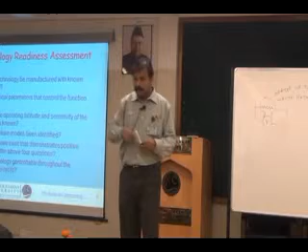Can you tell me what you understand by failure modes? This is one of the failure modes. I fail. When you sleep, I fail. This is one of the failure modes in lecturing. Do you understand? Get out.

Now why should I worry about the failure mode? Because once I know the failure mode, I can contemplate what is the effect of the failure on the rest of the system. So you have to identify the various failure modes of the product. We have to see whether these failure modes are completely known.

Next, does the hardware exist that demonstrates positive answers to all the above questions? It is not good enough that somebody with his theoretical knowledge says yes to all the 4 questions. Is there any proof in the field? Is there any product functioning which proves the technology, answering all the 4 questions above as positive? Probably I will give you an example which is very contemporary and relevant. Then you will understand the power of this tool.

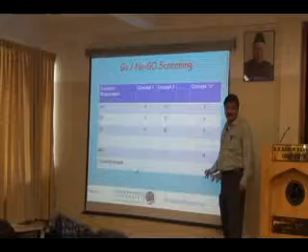Go, no-go screening: here what we do is we have various concepts, concept 1, concept 2, etc., concept n. Then you have the customer requirements. The customer wanted many things, and ultimately the product design is to meet all the customer requirements. So customer requirements are listed, and you have various concepts. If a concept meets the customer requirement, mark it Y; if it's not meeting the customer requirement, say N. You evaluate the various options and concepts and arrive at the one that suits your requirement best.

So this is a go, no-go screen. In go, no-go screening, there are only two options: one is it satisfies, or it doesn't satisfy. It either goes in or it is not going.

In metrology, in inspection also, we use a particular technique. If the dimension is acceptable, it is go. If the dimension is not acceptable, it is no go. In inspection, if a particular product is acceptable, it is go. If it is not acceptable, it is no go.

In inspecting components, we use this technique. The same technique is used to evaluate various concepts. A concept is acceptable for the customer based on a particular trait - then it is accepted, otherwise it is rejected. So you arrive at an overall evaluation and choose a particular component which satisfies the maximum customer requirements.

Next slide is the last one - the decision matrix method. It is an improvement on the go, no-go technique. It is a very comprehensive method. It gives you an option to quantify the performance.

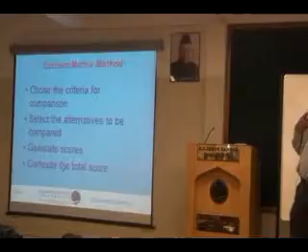It is a four-step process. Choose the criteria for comparison. Comparison on what basis? You are going to compare four options - on what basis?

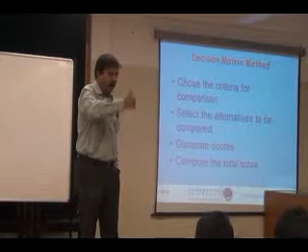So where can you arrive at these various criteria? It can be from technical specification, it can be from the voice of the customer, but arrive at criteria that are going to be used for comparison. This is the first step - I am going to compare the four alternatives based on these criteria. I can select 10, I can select 50, I can select 100. You arrive at the criteria to be selected.

Then select the alternatives to be compared. There can be 100 options that have come out of brainstorming or whatever tool you have used. Select the options, alternatives that are going to be compared. So the criteria form the various rows, and the alternatives form the various columns.

Generate scores. For example, a particular criteria, say aesthetics - how good looking the product will be. This is the criteria, and I have three options: 1, 2, 3. So you give a score. The score can be +1, -1, 0, or it can be +2, +1, 0, -1, -2.

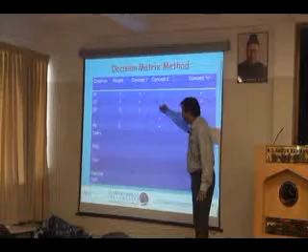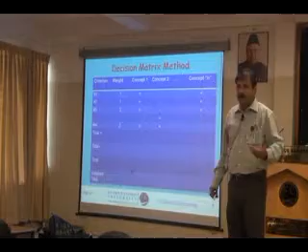This is the decision matrix method I have identified. I have also attached a particular weightage for each criteria. 7 means that is an important criteria, 1 means criteria 2 is not that important - or rather, I am saying that criteria 1 is 7 times more important than criteria 2. So you attach different weightages for different criteria.

Then you have the various concepts - concept 1, concept 2, concept N. Here I have used plus or minus, but it need not be just plus or minus. It can be from -3 to +3, or -2 to +2, or -1, 0, +1.

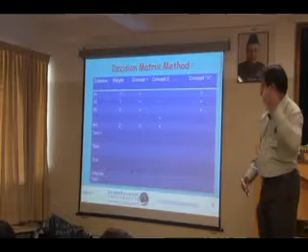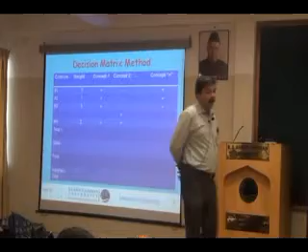It is your choice. Then, if you are using +1, -1, you can have a total plus, total minus, and a total - that means adding these will give you the total. Then I can also have a weighted total. So based on the total or the weighted total, we can make a decision whether a product is acceptable or not.

So these are the different ways by which the comparisons can be made - the various concepts can be compared and an evaluation can be made. Is it okay?

By next class we enter into the third stage of the design cycle, that is the embodiment design, the actual design implementation. We will see that in the next class. So today, is there any questions you have, any doubts?

Any questions, any doubts you have? Shall we proceed?

Now I have a very interesting product discussion today. I got curious because I happened to travel through Mount Road a week back, and the whole landscape has changed. I was surprised to know that a tunnel is being built under Mount Road. I became curious and wanted to know the technology behind it. The machineries are being imported from Japan, I don't know what they're doing for Chennai. Hitachi is one of the major players manufacturing these equipments. So I wanted to know what these tunnel boring equipments look like and how they work, and I found some interesting videos. I'll share them with you. Listen carefully, we have time today so we can see them thoroughly to understand better.

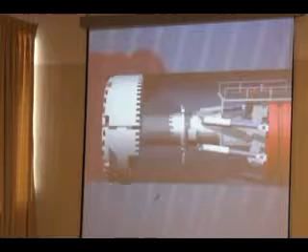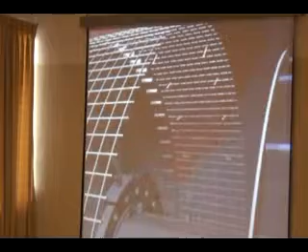While boring goes on, securing work is carried out under the protective roof immediately behind the cutting head. Here, for example, two anchor drills with independently maneuverable drilling carriages are used. They drill holes into the rock for anchors which can be up to 4 meters long. Another example is a mesh placing machine, which travels over the anchor drill and places steel mesh behind the protective roof to give protection against falling rock. Which securing measures are most effective against rock falls depends on the local geology. In one place steel anchors are best, whereas in another it may be steel mesh, caps or arches.

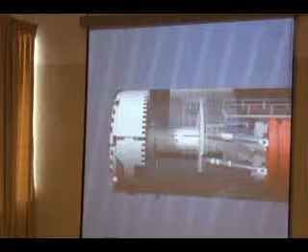Another means of securing are steel arch segments. The same mesh placing machine pre-assembles them under the protective roof. The complete ring is then transported to its final position, pressed against the rock, and installed there. It would now also be possible to secure with concrete, but we'll come back to that later.

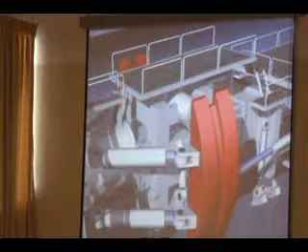When the TBM is working in hard rock, it uses a so-called gripper to press against the rock on both sides. Each stroke of the gripper takes the drive forward another 2 meters. The backup train moves forward with the boring machine. At the end of the stroke, the gripper is retracted, moved forward to the new position, and then tensioned again. The TBM can now cut another 2 meters.

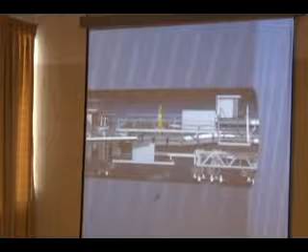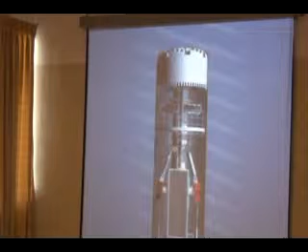Here we see, speeded up, how the feet are raised and lowered. When the second and fourth foot are raised, the backup train moves forward. When the first and third foot are raised, the cutting head drives forward. Here we see the view from above. The hydraulic mechanism releases the gripper for it to move forward, then it is tensioned again for further boring. The TBM can drive up to 40 meters per day.

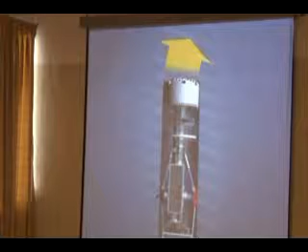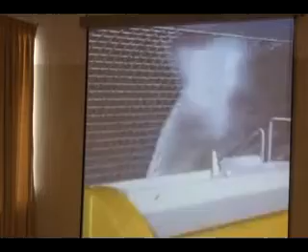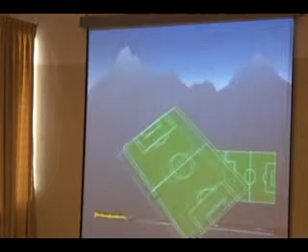Hydraulic cylinders control the horizontal and vertical position of the cutting head, making it possible for the TBM driver to steer the direction at all times. The shotcrete robot now finally secures the finished tunnel walls. From the boring head to here is a distance of 60 meters. The backup train consists of all the installations and materials needed to supply the boring machine and remove the excavated rock. It is like a moving factory, 410 meters long, about as long as 4 football pitches joined end to end.

This TBM was specially developed for the hard rock of the Gotthard. 50 of the 57 kilometers of both tunnels will be excavated with tunnel boring machines.

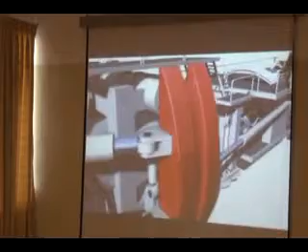So the next video is about the Bangalore Metro Rail project.

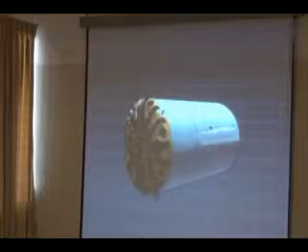BMRCL officials wanted to ensure that the disruptions caused by the building of these stations were minimal.

It's precisely the fact that it's in the middle of the city that we decided to go underground. There were certain sections where you cannot have elevated lines except at great destruction to the people on either side of the road. Apart from that, there is also a legacy to protect.

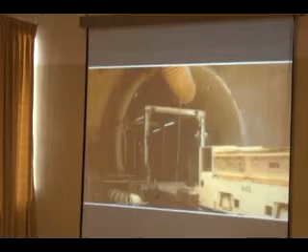The contractor for the Bangalore Metro underground construction is the CEC Soma CICI joint venture. While Soma works on the construction of the 4 underground stations, the Continental Engineering Corporation and its subsidiary in India, CICI, works on the tunneling process. With years of international expertise in building tunnels, high-speed rail, bridges and highways, and after meeting success with the Delhi Metro construction, CEC now brings the TBM to the Garden City.

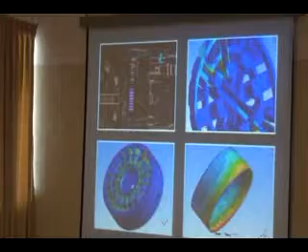The convoy is making good time, but it must reach Majestic Station before 6 a.m. to avoid the morning traffic. As the TBM had to be custom-made for Bangalore's geological conditions, a series of tests were carried out in manufacturer Hitachi Zosen's factory in Osaka, Japan. A visiting team of BMRCL and CEC engineers carried out the final inspection before the TBM was disassembled and shipped to Tamil Nadu, where it was loaded onto 28 trucks.

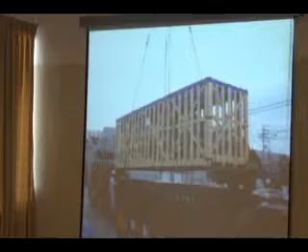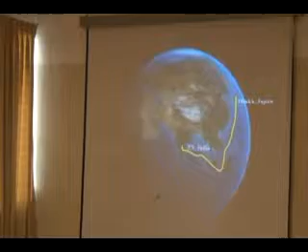Hitachi was a wonderful experience, and as the head of this organization, I learned a lot. My colleagues learned a lot in organizational behavior and group dynamics. The convoy, after traveling 7,500 long kilometers, finally stands at the Majestic Station at the break of dawn.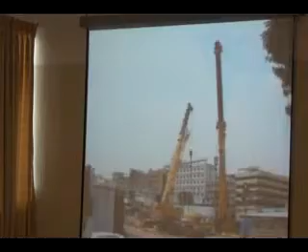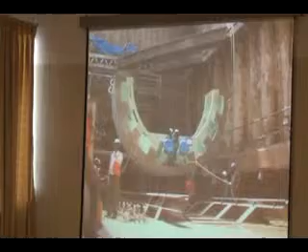There is excitement in the air. A shaft 28 meters long, 22 meters wide, and 16 meters deep is ready for TBM parts to be lowered into. Assembling the parts is going to be no easy task. Months of preparation have led to this moment, and all the workers have been trained to handle equipment and to follow safety precautions. The first part to be lowered is the front body lower section, which is the foundation piece around which all the other units are bolted.

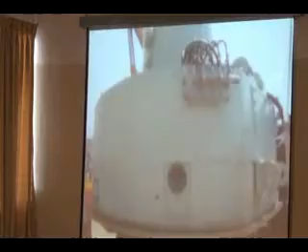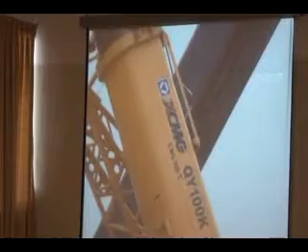Overseeing the assembly process is Project Manager Russell Brown. The second part to be lowered into the shaft, that weighs approximately 56 tons, is called the drive module. This section needs to be turned over into a vertical position. To do that we use two cranes. One of them is a 350 ton duty crane, and the second one is a 100 ton assist crane. Here, communication poses a greater challenge, as interaction with the crane operators is only possible through hand signals and radio.

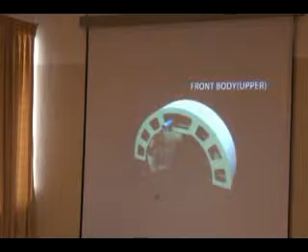The third module is the front body upper part, which is now fitted on top of the front lower body, wrapping around the cutter drive structure. Then, 10 cutter drive motors and a decompression chamber are fitted onto the driving module. We often inject an air pressure up to approximately 30 psi. This pressure is equivalent to what you would put inside of your car tyre. If you took this car tyre and put it inside of the cutter chamber, it would actually go flat because of equalising the pressures.

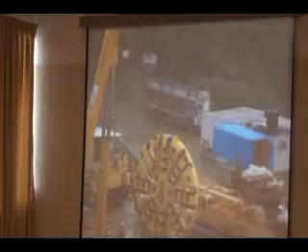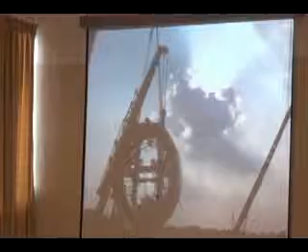On the 29th of April 2011, fighting with the Bangalore rains, the engineers lifted and lowered the cutter head. Post-cutter head positioning, the articulation section is bolted on, which allows the TBM body to be angled by degrees. The middle body rear side section, equipped with the 16 thrust rams, is then fitted into position. These are used when building segments or when pushing forward during excavation.

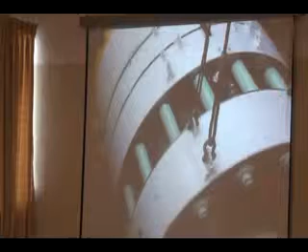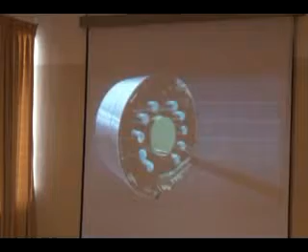Attached to this middle body is the slurry inlet and outlet pipe, which helps in carrying the drilled mud to a recycling plant on site. Here, coarse gravel and fine particles are removed, and the resultant slurry is then sent back to be used for tunneling. The final component is the rear body section with segment erector. This unit is fitted to lift and place the tunnel segment into the correct position before thrusting forward.

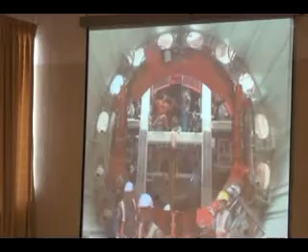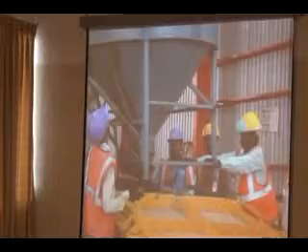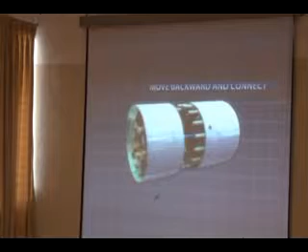These segments are manufactured in a plant in Peenya industrial area, where over 100 construction workers help manufacture segments at a speed of 12 segments per day to meet the 21,120 segments requirement. With this, the TBM stands completed, weighing a total of 350 tons.

BMRCL is new to tunnel. Bangalore Metro is new to tunnel. Namma Metro is new to tunnel. CEC is not new to tunnel. And we are quite confident about the ability of CEC. So CEC has got all the experts. And we are willing to share. And that's the good thing about this partnership as it begins to fly.

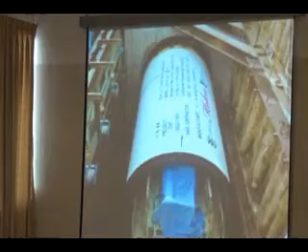So a similar exercise is going on in Chennai also. They have started the process. Now, see why we are doing these product case studies. The idea is that engineering poses many exciting problems, and finding solutions to these problems is engineering. Okay. What we are trying to do in these product discussions is just throwing problems before you so that you will get enthused and look into these issues at greater depth and detail.